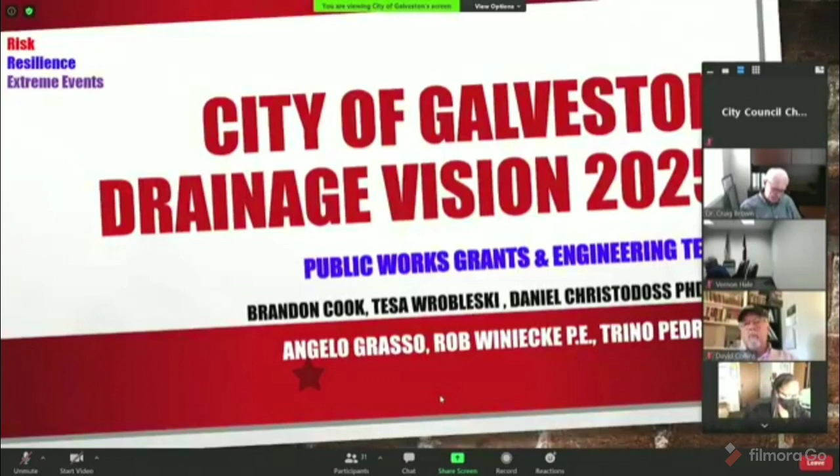Thank you for the opportunity to develop and share the Drainage Vision 2025 for the City of Galveston. First, I'd like to thank the City Council for their proactive leadership in drainage. Drainage investment in Galveston provides a far broader benefit than the city itself. During Hurricane Harvey, the Galveston International Airport kept the heart of Houston, Texas City, and all others in the region alive, while Hobby and Intercontinental Airport were flooded. Therefore, drainage investment in Galveston provides a regional, national, and global benefit because Houston is the heart of the oil and gas economy on planet Earth.

Galveston has been through its major challenges, but our proactive City Council turned these challenges into opportunities. After Hurricane Ike, which devastated the city, it started its rebuilding with the Ike recovery funds we received for repairing the damage to our infrastructure. Majority of these projects were in full motion in 2014. Drainage infrastructure resiliency improvement started as a subsidiary to the streets Ike recovery projects and has advanced to its primary focus in the city today.

Our City Council has consistently shown a strong emphasis on drainage infrastructure investment and has empowered city staff to find innovating funding mechanisms such as city and county bonds, IDC, CDBG, FEMA, and TDM grants. We'd also like to say a special thank you to our citizens who approved the bond election of 2017, a great milestone to improve our roads, water, and sanitary sewer infrastructure. Drainage was a sub or minor component of these projects, with the major drainage projects approaching final design and construction, so the improvement can be evaluated by our citizens after these projects have been built. Our lessons learned during Ike recovery and bond project implementations, and the weathering of numerous storms since Ike, has advanced our team, thank you team, to develop a 2025 drainage vision for the future.

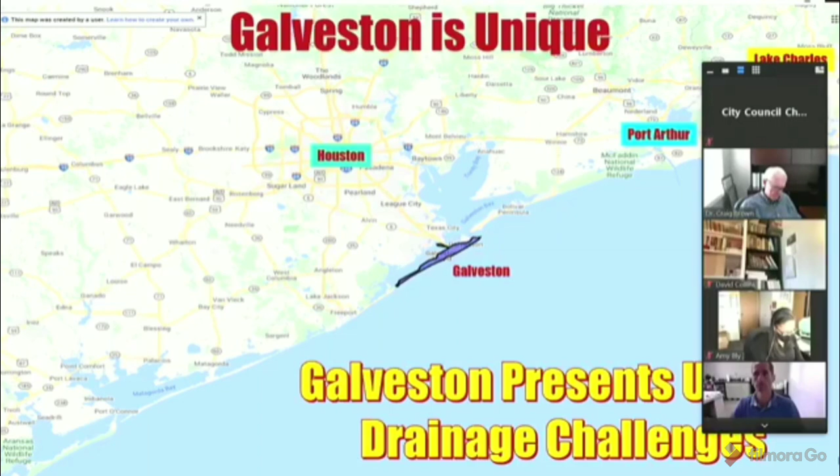In this presentation, the focus will be the vision, the solution, and its implementation. A model solution is in design right now. It has never been done before in the Houston-Galveston region, and its implementation island-wide could have far-reaching benefits to Project Galveston's leadership in drainage solutions. I said leadership, and I mean what I say. It's the council's leadership, it's the citizens' leadership, it's the City of Galveston elite team's leadership.

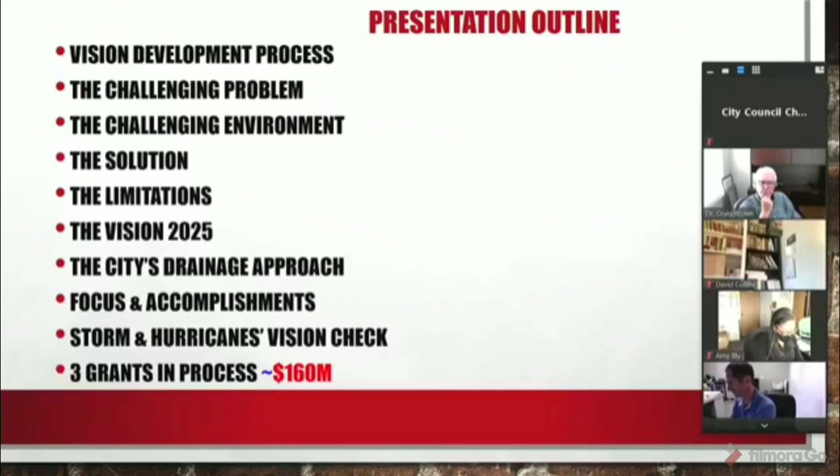Developing the Drainage Vision 2025 for Galveston.

Too often, teams try to find solutions before understanding the problem, and that leads to a path of failure. Galveston has been a special graveyard for contractors, engineers, and many others because they did not understand Galveston is unique and tried to implement a Houston, Austin, Boston solution to our unique and historical Galveston Island, and they failed.

Solutions need to be realistic and cost-effective, providing the best return on investment for the community. Nothing happens without funding. To get funding and compete for funds with the entire United States, we have to communicate to the citizens and the grant agency that our Galveston unique solution provides the best return on investment. Providing that communication needs extensive research, conceptual design, modeling and presentation of a grant application to the funding agency, bond election, and addressing communities' questions factually.

We cannot secure funding with emotional adjectives and qualitative statements. It has to be an engineering analysis. Once we secure the funding, we are on the clock to implement the solution.

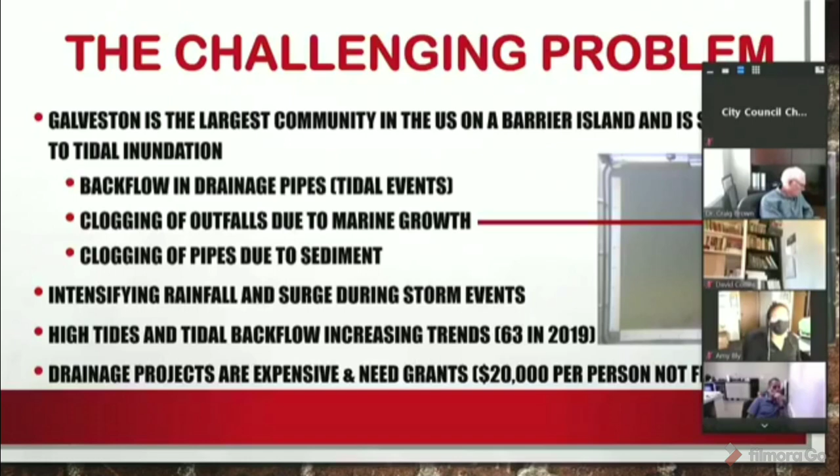So we talked about the challenging problem. Next slide, please. The challenging environment. All of these are facts, but the inadequate system capacity, which is the fifth bullet, is not because somebody made a mistake. Our storm systems were designed for rainfall intensities that are a fraction of what we see today.

The tidal backflow and marine growth further restricts drainage. There is a viable solution, but it is expensive, and the city has been aggressive in applying for grant funding and has secured their first regional pump station grant of its kind for a stormwater pump station in the region, to minimize the burden to our community, since the majority of this project is funded with state and federal grants.

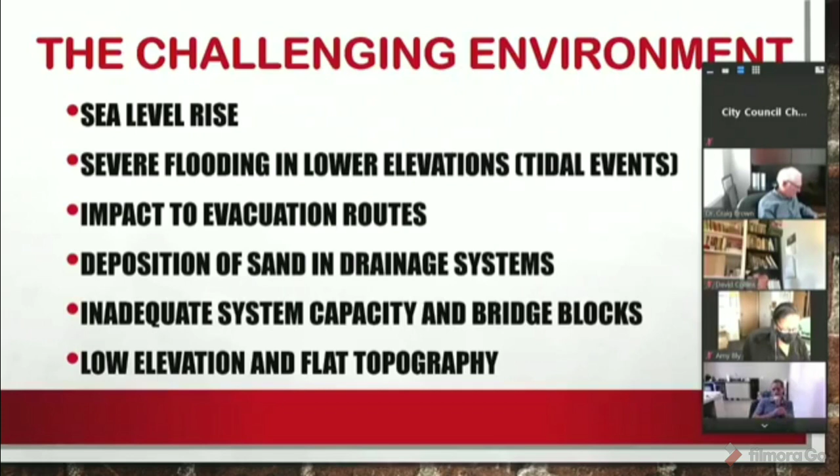Okay, next slide, please. So this is about climate change. Relative number of extreme events has increased by 40 percent in the last 70 years. These events have been characterized by increasing frequency of high tides and intense single-day precipitation events that have typically been extremely heavy downpours. We have to be realistic.

We cannot make qualitative statements. Putting a dome over the entire city of Galveston is not an option. Next slide, please.

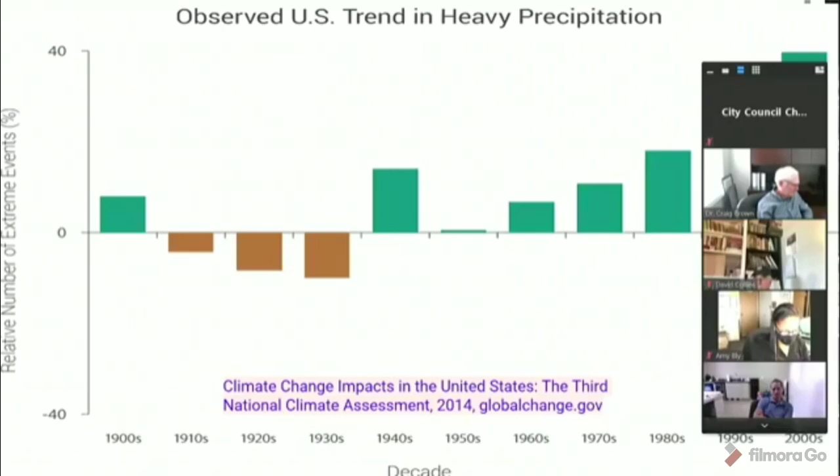Here is our challenge in the next slide. As you can see, the rain chooses to come many times exactly when there is a high tide, about 3.5 feet in the bay. So instead of water flowing in the right direction towards the exit to the bay, the outfalls, it starts flowing backwards. And when it starts flowing backwards, you have the sediment and the marine life that clog the outfalls.

Now, we didn't sit there like awesome engineers and look at nature and say, it's your problem. We took the bull by the horns, as we do in Texas every time. And we have applied for a grant for the South Shores pump station, where it backs up all the time during high tide on 59 streets. It's $48 million, and we are applying for it. So most of it can be funded with federal and state funds. It's in process. Next slide, please.

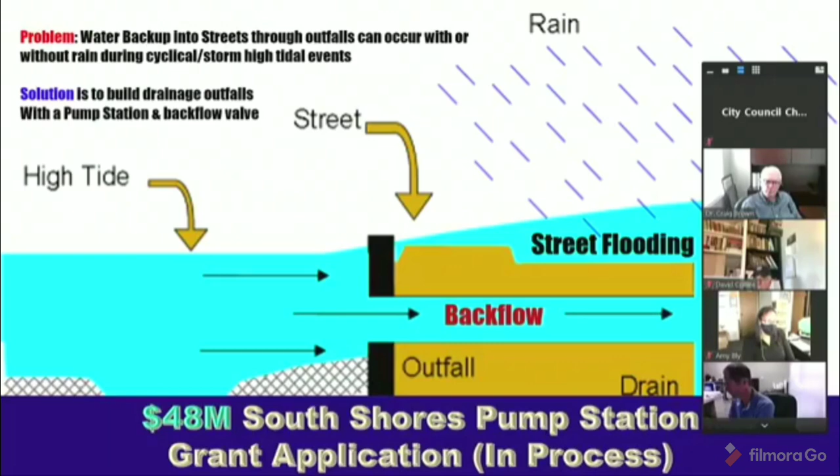So we talk about pump stations. Are we making Galveston the guinea pig? By no means. Both Texas City and Port Arthur have stormwater pump stations. Louisiana and Palm Beach have pump stations. Miami Beach have pump stations. Why didn't we do it so far? We are doing it now. So citizens, you should be proud of your city. Both cities are affected by high tides. Galveston is no exception. Next slide, please.

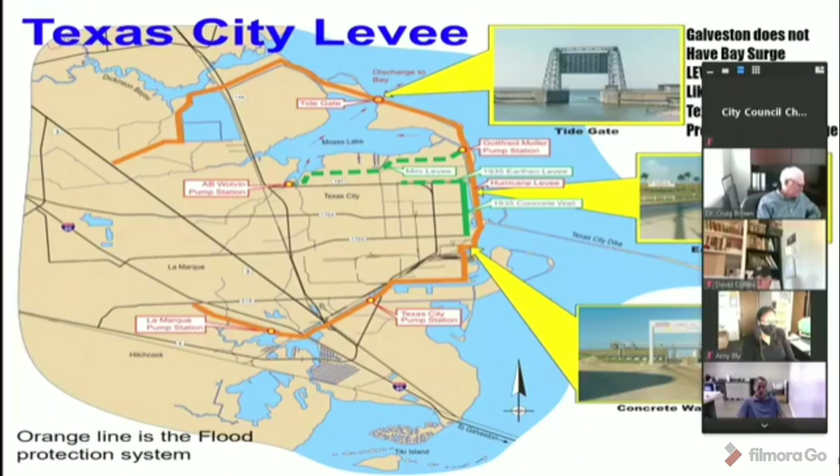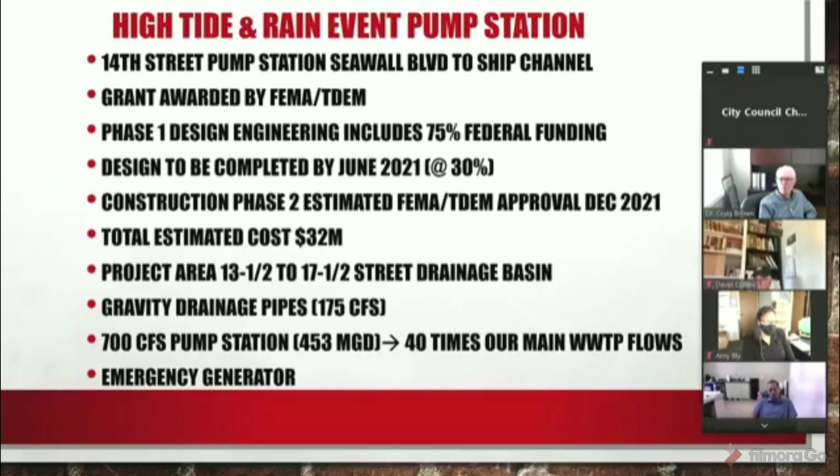Pump stations in conjunction with gravity drainage systems, as I said, used in Palm Beach, Florida. The city developed an approach unique to Galveston and applied for and was awarded a grant from HMGP for the 14th Street pump station in conjunction with local match. We expect the pump station to be in construction late next year to serve as a model for our citizens, island-wide, nationwide, and globally. This is a large pump station, about 40 times the size of our wastewater plant, which means it rains 40 times more than the amount of water that we drink. Let's go to the next slide, please.

Galveston outfalls get clogged, but pump stations can keep it from getting clogged and pump at 4 times a gravity pipe system can, promoting effective drainage even during seasonal high tides and heavy rainfall events. But pump stations are cost prohibitive without grant funding to supplement local match.

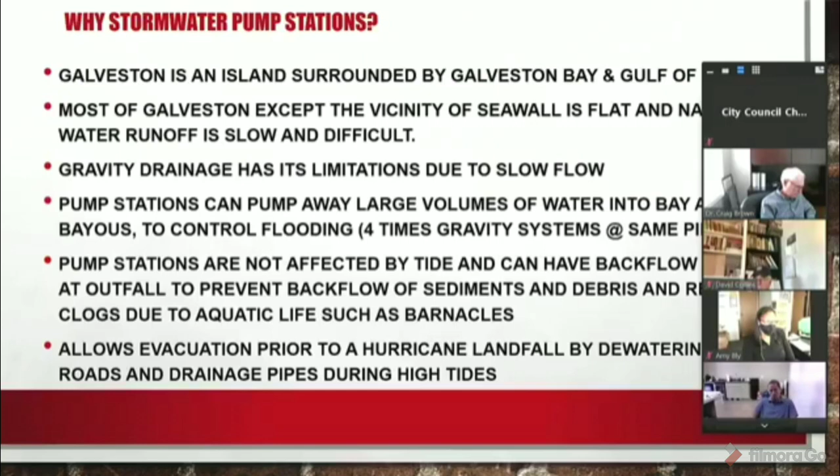So how do you keep the aquatic life and sediment out? We put some duckbill valves, as you see in the next few slides. So here is the concept of our pump station that is in 30% design. Let's go to the next slide, please.

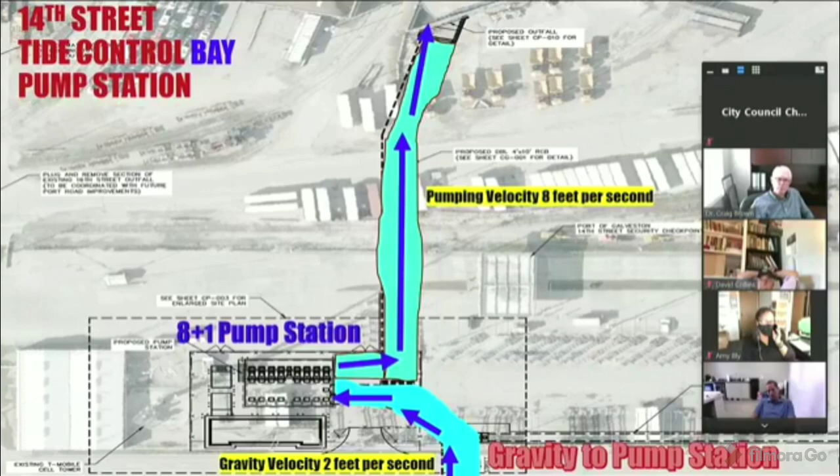Here's the pump station in design for the 14th Street project. Stormwater flow into the pump station is by gravity and is pumped out by pressure flow into the bay. We have 8 pumps in this pump station and 1 little jockey pump for low flow. This pump station will pump at 4 times what the same pipe can pump. It's a tide control, barnacle control, aquatic life control, sediment control, all in one pump station. Let's go on to the next slide, please.

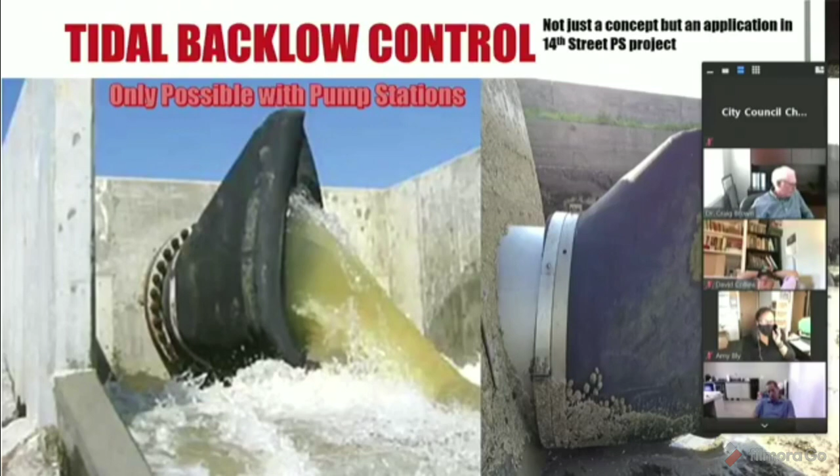There's one of the possible solutions for tide backflow control. One way, it goes out, the beak of the duck closes, and it doesn't go back in. Let's go on to the next slide, please.

So I said 14th Street Pump Station is our model. And now that we know it will work and it has advanced and we've had a federal grant with TDEM's help and the team's help, we are advancing into the CDBG MIT grant for 3 more pump stations. So what you're looking at is our drainage master plan.

The line in purple is our proposed 37th Street pump station project boundary in our grant application. The lines in red are pipelines and are a concept portraying what is recommended within the project boundary to convey the drainage to the pump station.

This is straight from our drainage master plan. The lines shown are conceptual, and when awarded the grant, we will actually perform the surveying, field surveying, design. It will be boots on the ground, and we will perform the actual design, and the sizes might be different from our master plan. Now, the master plan was based on the NOAA Atlas storm frequencies in 2007.

13 years have passed. Last time we looked at the master plan was in 2014. Design standards have increased. Therefore, we need to update the old master plan to our current Atlas 14 NOAA storm frequencies per our latest drainage code.

Also, based on the condition of the outfalls from the recent assessment report, we may have to prioritize from our master plan and embark on larger projects to upsize and replace the existing outfalls. If we try to clean the barnacles and chisel and hammer, the outfalls will collapse. We have to replace them, make them bigger.

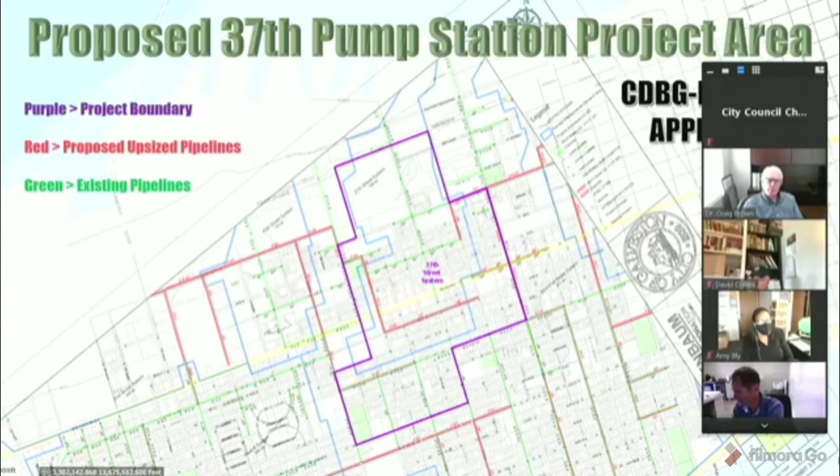So what you're looking at is the 51st Street pump station that is also going into our grant application. Next slide, please. We can go to the next slide.

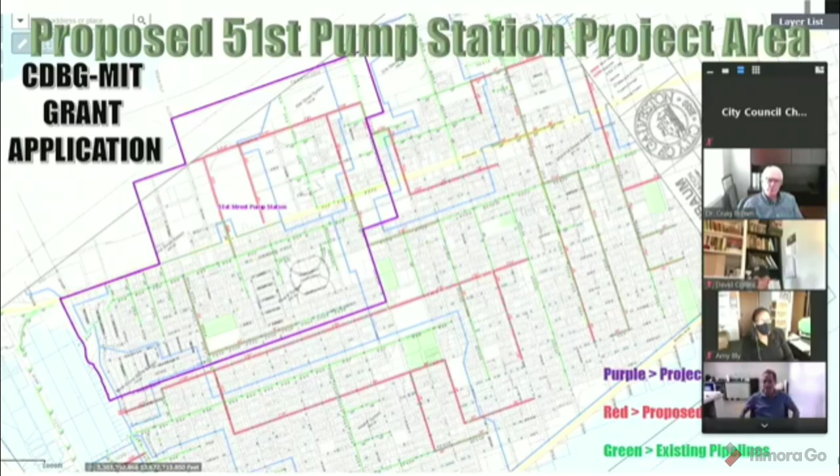So that's our South Shore that's been a candidate of tidal backflow control. Next slide, please.

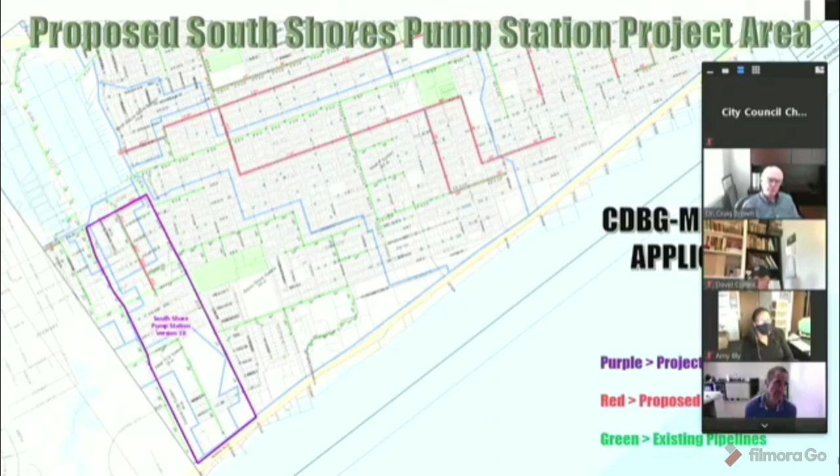Here is a ring levee concept, if designed and with good coordination with the city and community input, could function effectively with our stormwater pump station. Our pump station is being designed at the 14th/15th Street location in conjunction with the U.S. Army Corps permit for the outfall, and we have 3 other pump stations in the grant application that will also require this permit. Next slide, please.

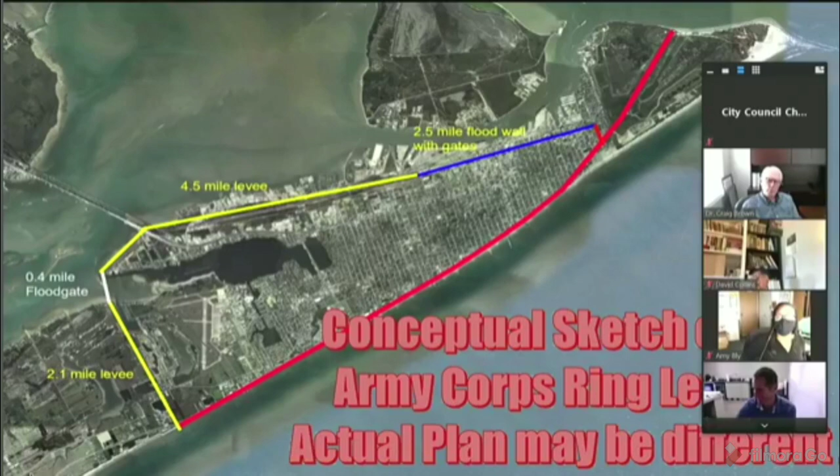But we just don't jump to solutions because a lot of people have died in Texas and all over the world because someone fell into a ditch and his brother jumped in and he died and 7 people followed. We don't do that thing with drainage, sir. Not like that, ma'am. We use engineering practice. We don't use qualitative statements. We quantify the problem. We find the problem and we fix it. That's why we are Texas.

Let's go on to the next slide, please.

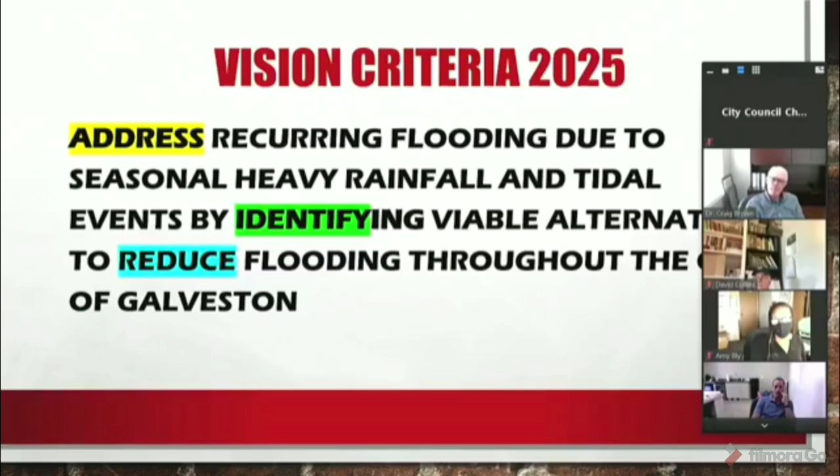This is our Galveston Island-wide Vision 2025. The first thing we're going to do in 2021 is take a look at our master plan, develop a new master plan that will address the east end and the west end. Based on that master plan, we would come up with new projects that benefit the east, central, and west end, and go to citizens for their feedback. Engineering analysis and community input are important, and this will be an integrated City of Galveston-wide list of projects that everyone needs.

We are not planning on keeping the streets dry, because that would take trillions of dollars and has never been done anywhere in the world. What we're going to do is keep the water out of the garage. How? It'll be based on a 25-year storm, where emergency vehicles can still travel, but the water will stay in the city right of way and not enter the garage. The key would be new pump stations, new outfalls, and new backflow valves.

Let's go on to the next slide, please.

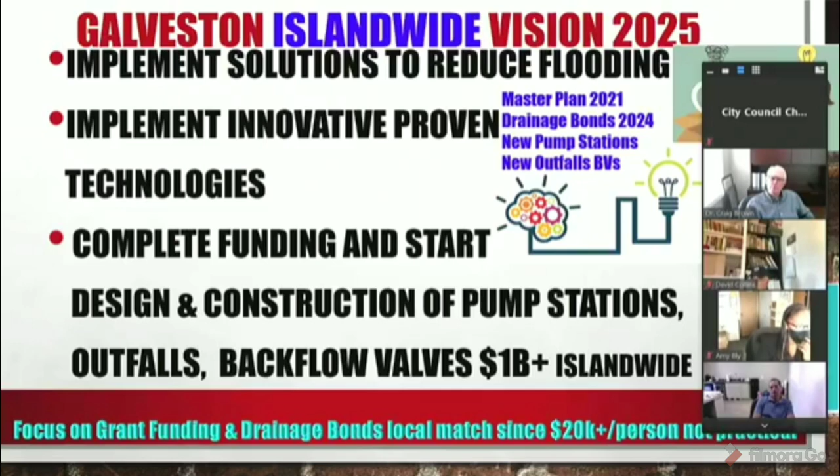So the question is, Mr. Christodos, good slides—what have you done so far? You've been the city engineer for the last six years. Well, this is what we did.

Right after Harvey, the city addressed the source of its resilience, the Drainage Criteria Manual. The city, leading by example, implemented the new drainage criteria on select drainage capital projects. The public works team, in conjunction with the proactive development community we always cherish, has been innovating low-impact development technologies to reduce the cost of service, which is already low, and also to reduce the cost of capital and economic development.

Examples include the Oleander development, the storage facility on 67th and Stewart Road, several hotels on Seawall, and cruise parking lots near Harborside, which have incorporated low-impact development concepts to advance aesthetics, increase permeable landscape, and address drainage capacity on-site to reduce off-site street flooding. We have a vision, but we're also going to keep problems from stopping our pathway toward it, helping developers with innovative approaches that think outside the envelope.

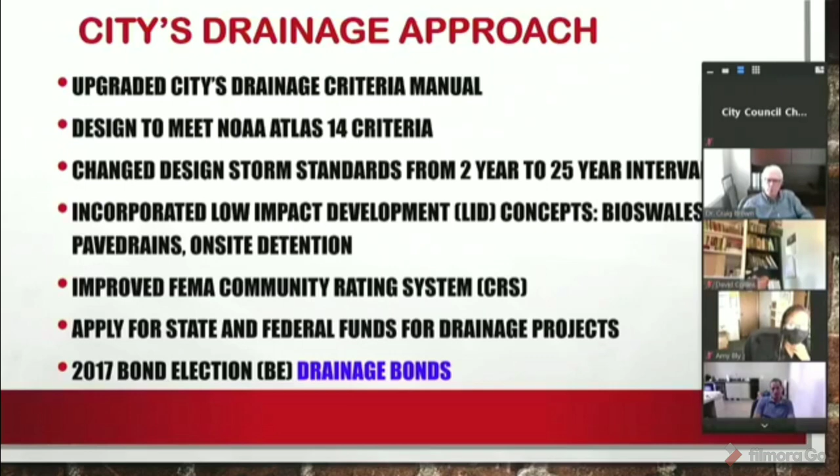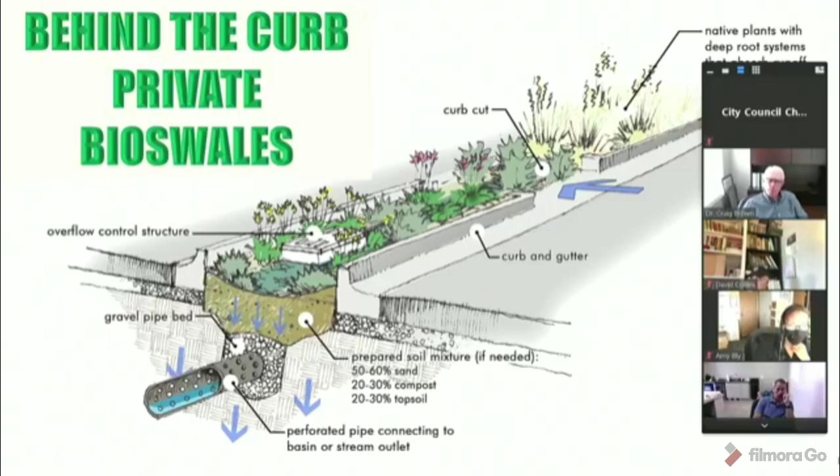We've been talking to developers, and we've been proposing bioswales behind the curbs to reduce the stormwater entering our system.

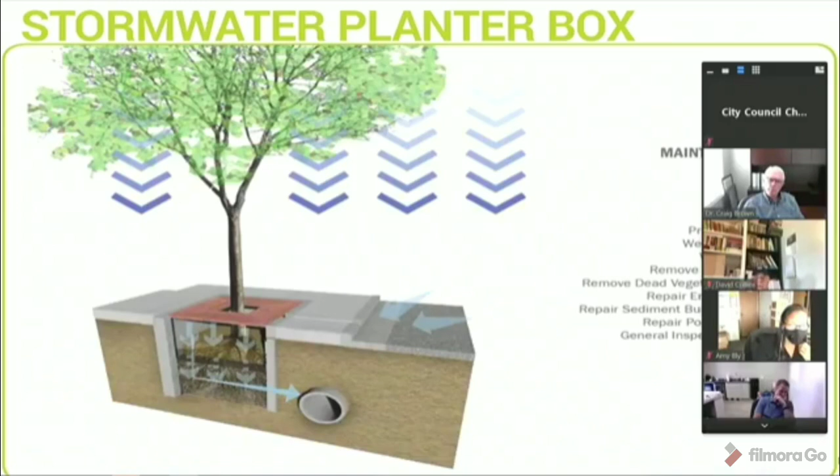We are going to have some awesome aesthetic greenscape, stormwater planter boxes which provide detention.

So there's me in a fire truck pumping water onto the ground, and nothing runs off to the city roadway system—it all goes below ground. How is that possible, Mr. Christodos? Let's go on to the next slide.

This is called low impact development—a PaveDrain system. What you see is a half-moon pipe below the PaveDrain surface, and in conjunction with a couple of feet of gravel, we provide on-site detention. The city will never see this water on the road.

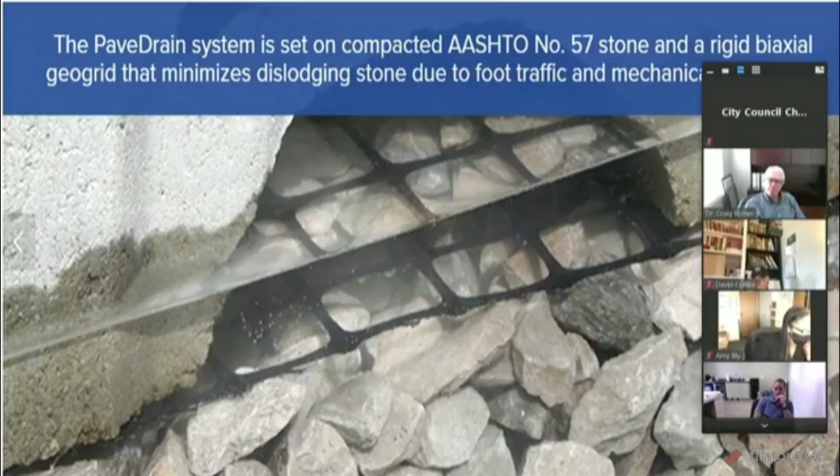Our city council and our team have focused on strategic drainage projects to provide the best benefit to our citizens. That's why careful planning after the completion of Ike roads and drainage projects led to the passing of the 2017 drainage bond election, which included two major drainage projects: 18th and Church.

These primary drainage projects, 18th and Church, will be very effective during typical heavy rainfall events and occasional high tides. The Church Street project will include installation of a new 37th Street outfall and repair of the bulkhead, followed by pipe cleaning from the new outfall to the 37th and Church Street intersection. The 18th Street project will benefit a drainage area extending from 23rd Street to 17th Street. A diversion structure will be built to divert flow to the future 18th Street pump station, which we will apply for a grant for, and if approved, that'll happen. We're in the process of identifying a good match.

We also did an outfall study from the bond election, which was completed in 2019. Most of the outfalls were identified and found to be clogged with marine life, barnacles, and debris from tidal backflow, based on the study we performed.

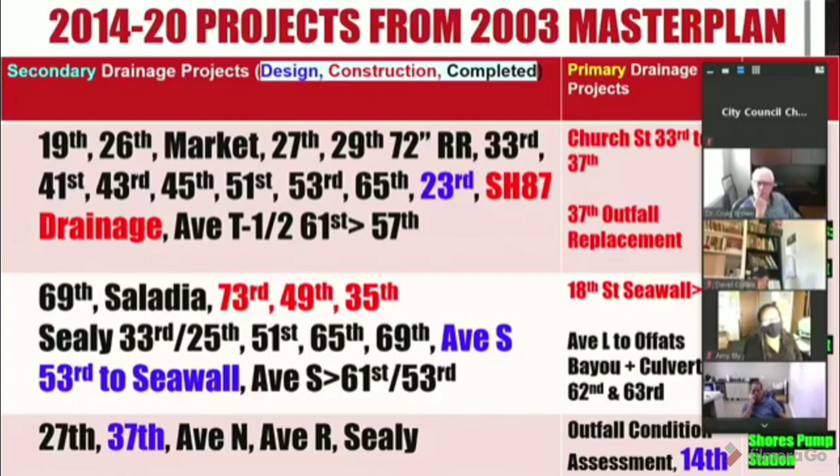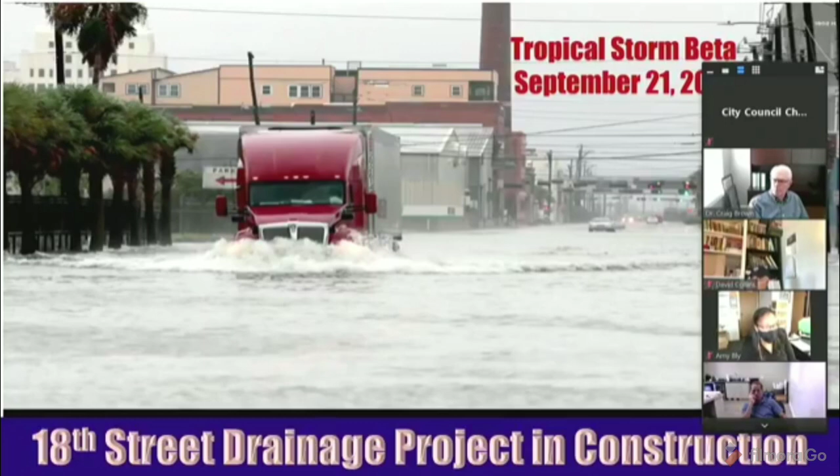So this is our favorite. My kids love to go to Strand. They'd rather go to Strand than go to Disneyland. They love Strand. We have been busy with the CDBG MIT grants and have not defined boundaries to address the drainage in this area. We are just starting the process and will review our drainage master plan and recent hydraulic models.

And supplement it as needed to optimize the grant application focused on this area. This area will be covered in the BRIC grant. BRIC stands for Building Resilient Infrastructure for Communities. Downtown Galveston, you haven't been forgotten. You are in our heart. We are coming back. Next slide, please.

The location of 19th and Mechanic, hopefully our police chief will take care of people who drive in those trucks flushing water. And the project, 18th Street, will have indirect benefits to this location. Next slide, please.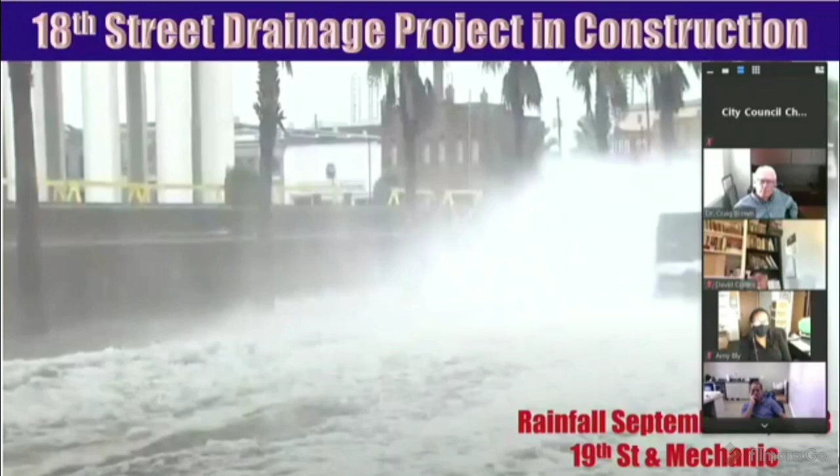So why did we choose the 37th Street project, 37th and Harborside grant? We just didn't pull it out of a hat. There was engineering, there was analysis of history, recent storm events. We also analyzed our drainage master plan, and we came up with the 37th Street pump station.

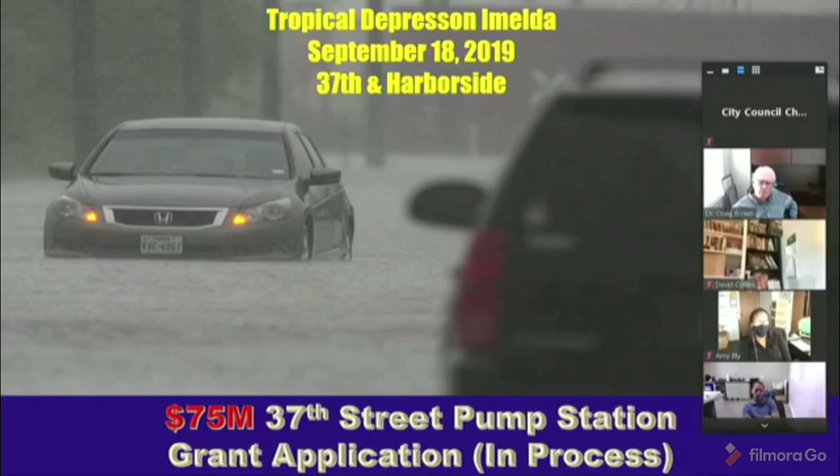So this will be part of the BRIC grant in the future, and downtown, we will be addressing pretty much every location in downtown that is cost-effective and feasible and implementable. Next project, please.

19th and Broadway. This will also have benefits from the 18th Street project that will reach to this location. Now, the important thing that I didn't mention is the city has excellent relationship with TxDOT, the state, and our area engineer in TxDOT has been very helpful.

We financed drainage studies on Broadway, starting from 16th Street all the way to 48th Street, and TxDOT funded the design and construction. Broadway was acting as a dam. It's been lowered by a few inches, and now when they are done, water can go from the south to the north. We have some bridge blocks, and that is also going to help.

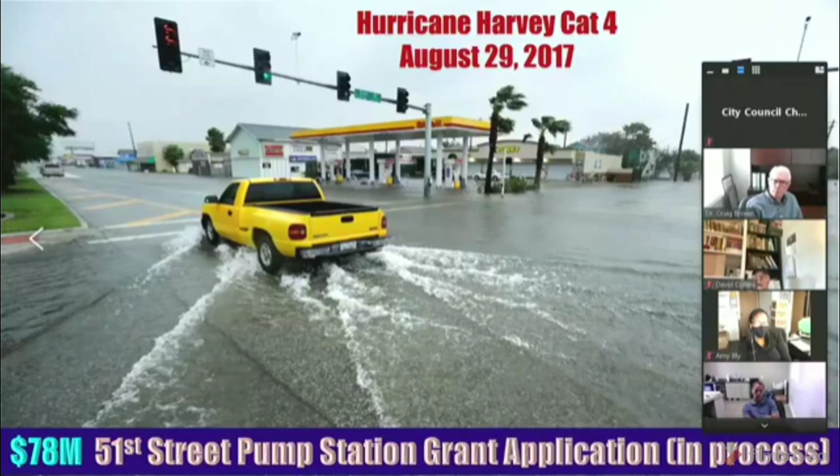So the next slide, please, and that will be the 51st Street grant application. Why did we choose it? We chose the 51st Street grant application, one of the reasons because of this photograph. One of the previous public works directors said Harvey was actually a 25-year storm for Galveston, and that fits our drainage criteria. We have a $78 million grant application for the 51st Street pump station that is in process.

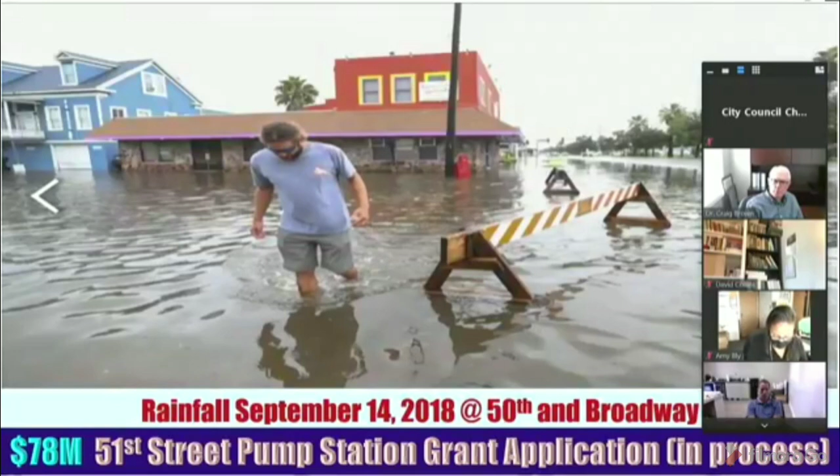We reviewed the drainage master plan. Next slide, please. And this is also going to be part of the CDBG MIT grant that the team is helping us with. Next slide, please. This is at 50th and Broadway.

This is a famous slide because the South Shores pump station will help with this project. I'm sure I'm going to miss the canoes, but we don't need to have people go in canoes on streets which need to be having cars driving and the silt coming back. We have a $48 million South Shore pump station grant application in process, and we are going to use streets for what they are intended to be.

Let's go on to the next few slides, and that'll be the area for the 3 grant applications. There's a South Shore pump station grant application, and when you have Harborside and Broadway flooded, this is going to provide benefits, a 61st Street evacuation route for the entire city of Galveston. Next slide, please.

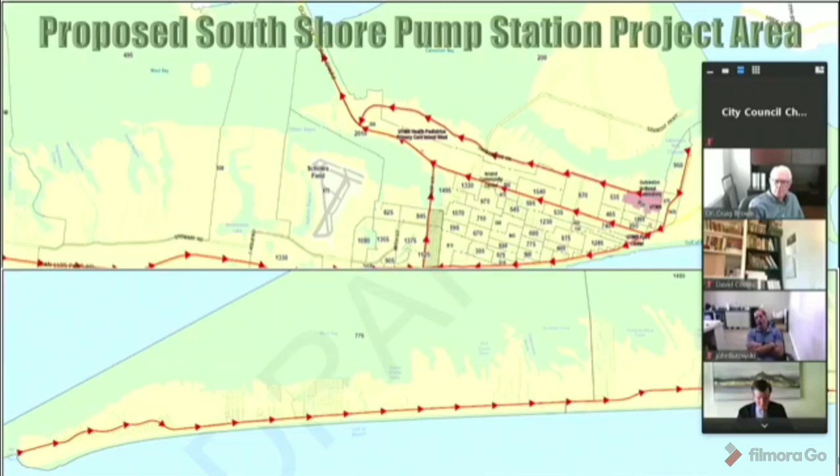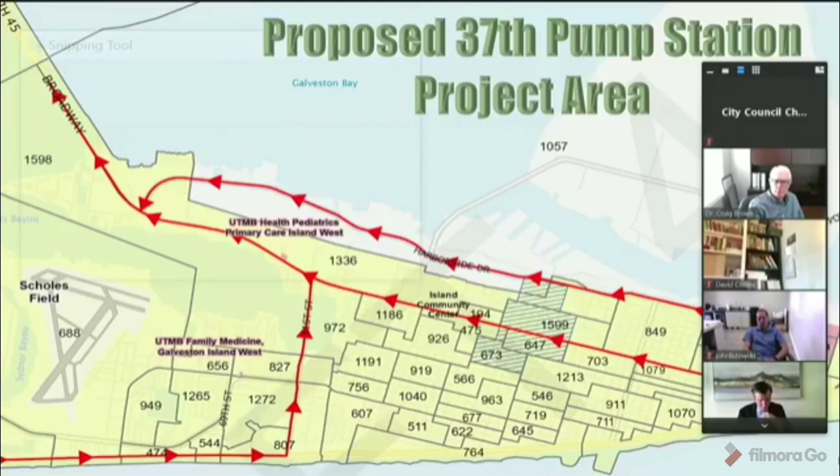37th Street pump station extending benefits citywide. Now, what I forgot to mention is that hashed area that you see in all these slides is the project area in which we'll be installing pipes and pump stations, but the benefits will be citywide. Next slide, please. That's the 51st Street pump station, and that will provide 3 evacuation routes.

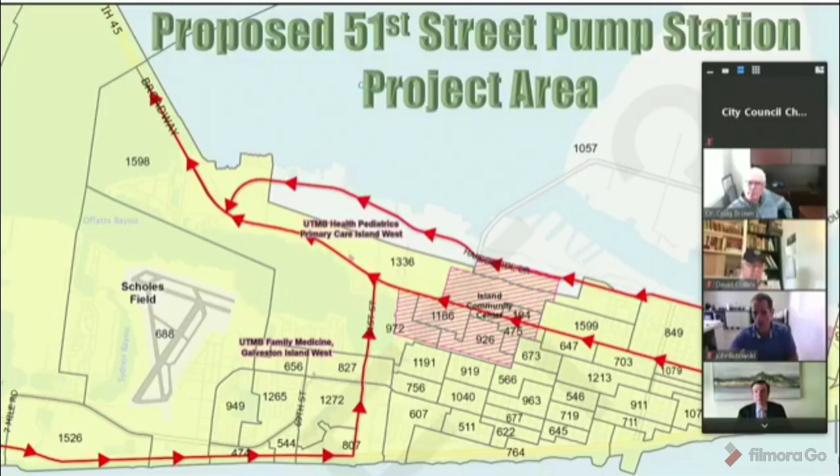Council, city manager, if you have any questions, I'll be happy to answer them. I also have Brandon and Tessa on the line. So please, we appreciate questions, or we'll be really heartbroken. Daniel, thank you very much. Great presentation and very, very detailed. I greatly appreciate it. I really appreciate you.

You're welcome. I really appreciate your evaluation of drainage to not only be drains and outfalls and things like that, but to consider pervious surfaces and other things, and trees and other landscaping approaches that help throughout the island also. It's a multifactorial approach, I think, to drainage, and that's the way it's going to have to be here on the island. Council, any questions for Daniel? You're welcome.

Yes, sir. Mr. Listowski? Yes, sir. Absolutely. Thank you, Daniel, for your presentation. It was the most enthusiastic drainage presentation I've heard, so I know that we have the right person for the job. Thank you. This is the 2021 kind of master drainage plan. What is our timeline on actually getting some of this in the ground and up and functioning? Can you just give me a rundown on a timeline on when some of this stuff will happen?

Yes, sir. The 3 pump stations in application, the 37th, 51st, and the South Shores Pump Station, Tessa could correct me, but I believe the grant award will be notified sometime next year, probably in summer. And the 14th Street Pump Station is already in process. The Drainage Master Plan 2021 is already in our capital improvement budget, so we can do that in-house. The team would prefer doing it externally. Some of it has been done, and we'll be identifying projects from the Drainage Master Plan.